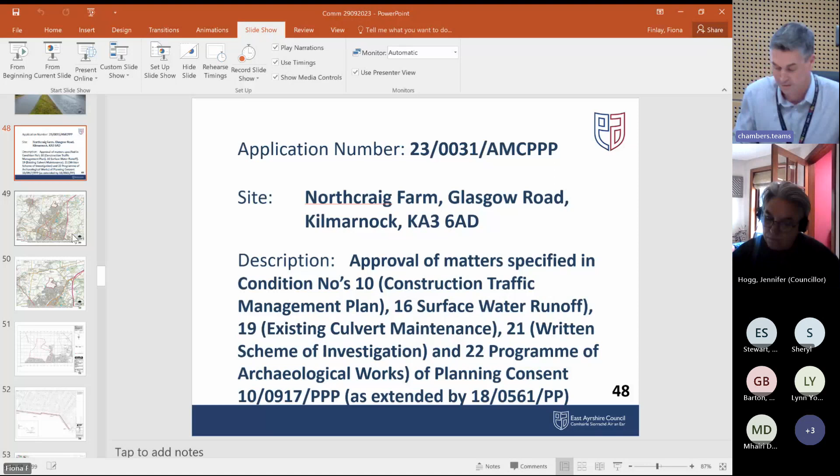This site is part of the overall Northcraig residential land release with the extant live planning permission for residential development at the very north of Kilmarnock. There's quite a significant planning history for this site, and members will recall that a layout was at Planning Committee earlier this year, and that starts at paragraph 7 of your papers.

We have before us an application for approval of matters specified in conditions of a planning permission in principle, to discharge the stated conditions. These relate back to the original planning permission in principle for the site, detailed at paragraph 15 on page 153. Members can only consider the details within these 5 conditions as part of the decision-making process today. For clarity: condition 10 for a construction traffic management plan, condition 16 for surface water runoff, condition 19 for existing culvert maintenance, condition 21 for written scheme of investigation for archaeological matters, and condition 22, the programme of archaeological works in relation to condition 21.

Consultees in turn have advised from ARA Traffic that the revised CTMP for condition 10 addresses the haulage road and lack of info on staff parking, site deliveries, wheel washing, and the extended route to the site, and these all address ARA's initial comments, following some discussion back and forth with the developer.

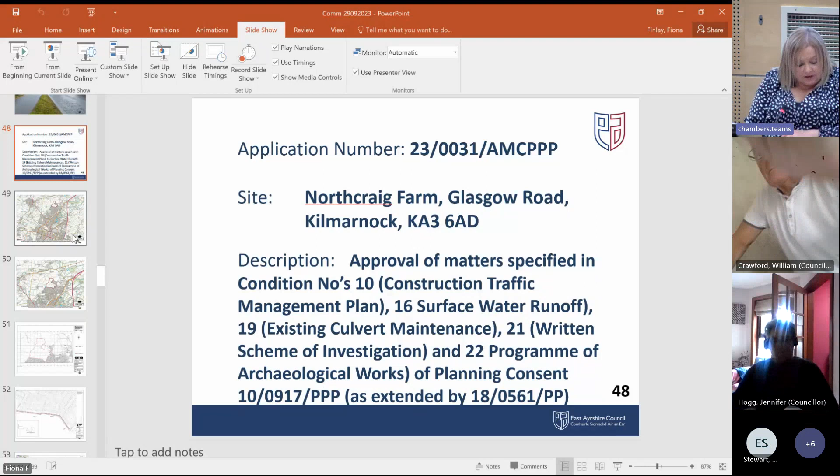ARA Flooding have no objections and advise conditions 16 and 19 can be discharged following confirmation being provided by the applicant to address ARA flooding issues. SEPA has no objections, and WoSAS has no objections in terms of conditions 21 and 22.

I have a couple of plans for you, members. There's not a great amount on this one, it's just more to remind you where the site is, because it's really just conditions that we're discharging.

This shows you in Kilmarnock - you can see we're very north of Kilmarnock, this is the Meiklewood interchange. You can see South Craigs here, and we have the Northcraig residential development about here, so very top of Kilmarnock. For context, this is the roundabout where Western Road and Glasgow Road meet, with the neighbourhood shopping centre just there, so we're in between that and the M77.

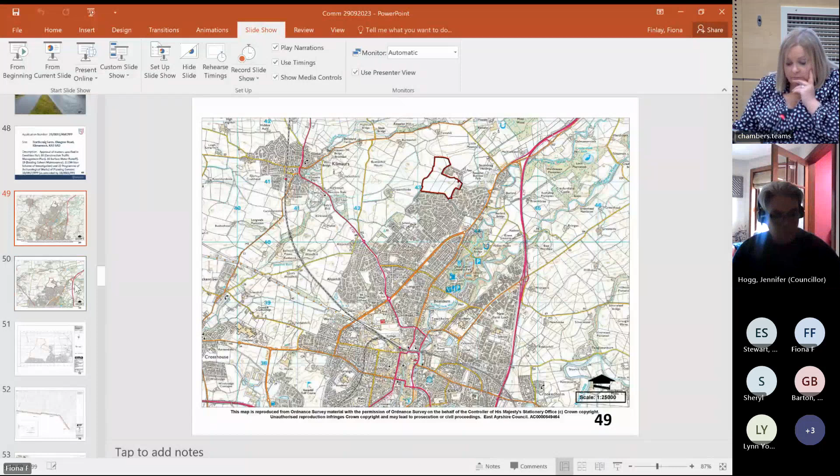A bit more detail there, members - you can see the neighbourhood shopping centre, Southcraig Holdings, the industrial estate, and the motorway interchange up there.

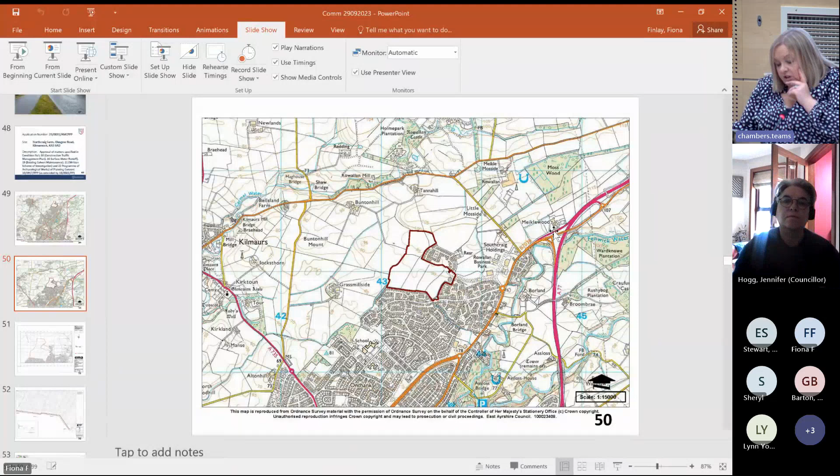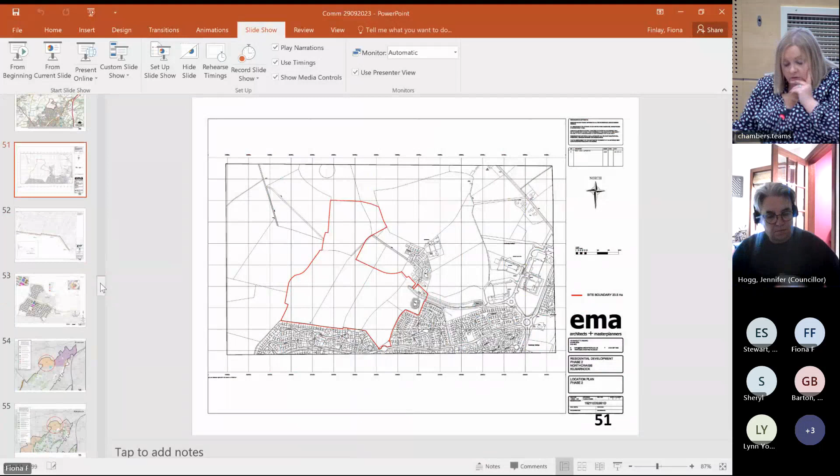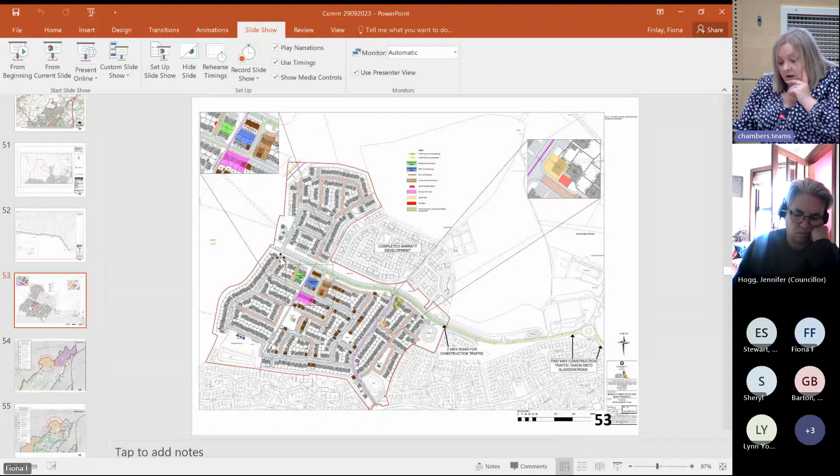And just the site from there, members, to show you the application site itself. This shows the details of the CTMP, about construction traffic being taken in off the main road and limiting to that, and the general layout there.

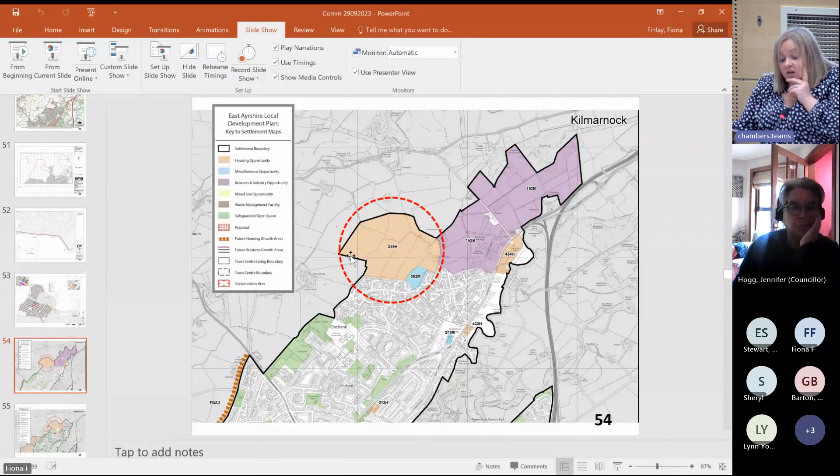I'll just show you the site layout in terms of the allocation under the development plan. It's residential in nature, and that supports the planning permission in principle. There's probably not an awful lot else to show you, members, but I'm happy to work back and forth.

We do have 2 letters of representation objecting to the application. These are detailed in your report, but in summary, one of the objectors has asked if drainage is put in, will Wood Hill Burn be left as it is? If so, there are concerns that it would become stagnant and foul.

In response, we've advised that condition 16 relates specifically to mitigation work to prevent surface water runoff from the development entering existing residential properties, and in general terms the proposed application layout proposes 3 SUDS areas to manage and control surface water flow. As per the report, the aim of SUDS is to slow the flow of surface water, encouraging natural infiltration, water storage and controlled water dispersal.

Maintenance will be by the factor for the estate, responsible for ensuring the SUDS basin is maintained and mown, inspecting grass swales for debris clearance. Significant sediment accumulation will be noted, initiating measures to clear these and prevent sediment entering the grass channel, and reseeding failed areas. Maintenance of a hawthorn hedge has been queried, and existing hedging on site is to be maintained by the landscape factor.

Issues with nettles spreading into neighbours' gardens were raised. We can advise that a landscaping area is to be provided to benefit existing properties that adjoin the site and provide a natural buffer between existing and new development. The drainage ditch is there to further benefit existing properties, preventing surface water entering properties, and it is to be regularly subject to factor-controlled maintenance, including removal of nuisance plants.

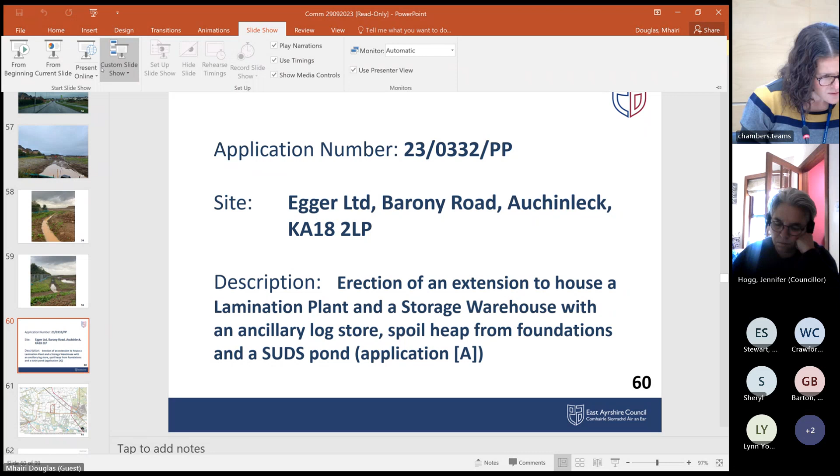So this report considers 3 separate applications for planning permission, which are all intrinsically linked to the same development. One of the applications is for a major development and required to be determined by the Planning Committee. However, due to the interlinked nature of the other 2 applications, which are local developments, it was considered expedient for the Planning Committee to determine all of those applications. I'll summarise each of the applications before going on to some site photographs and a summary of the main considerations and recommendations.

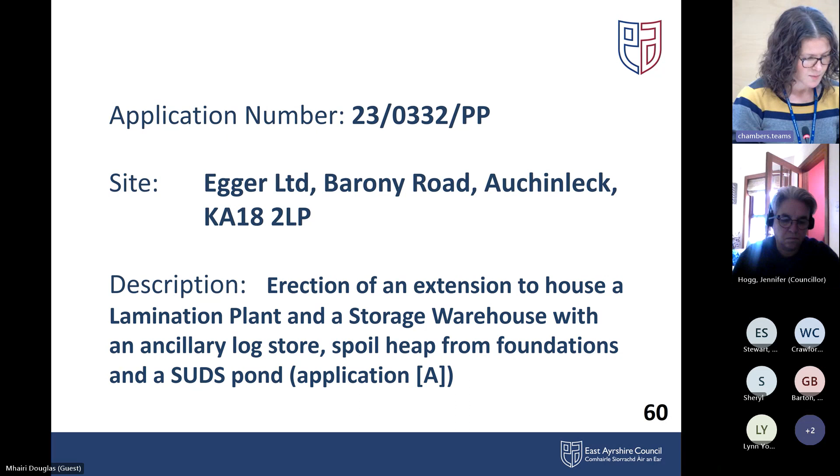So the site for development is located on the Barony Road, approximately 1.4 kilometres west of Auchinleck. The site was formerly used as a coal processing area associated with the Barony Colliery, which is on the south side of the road.

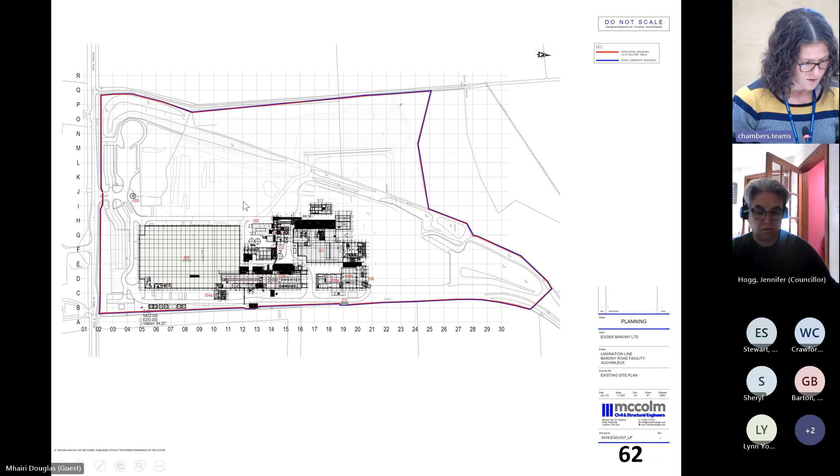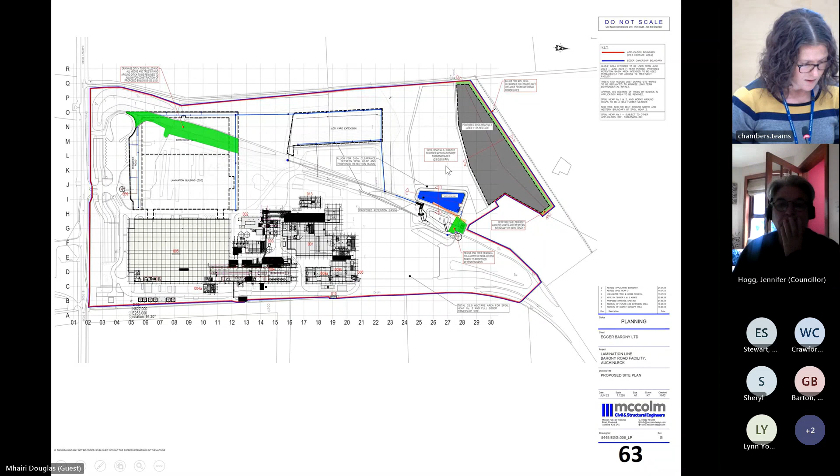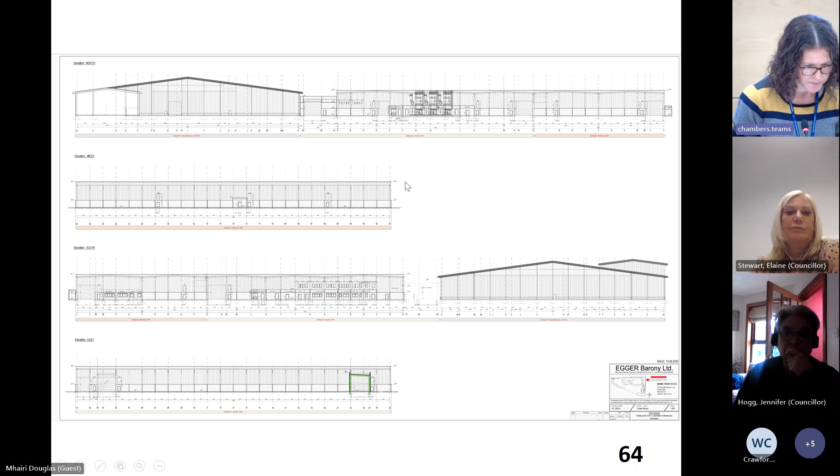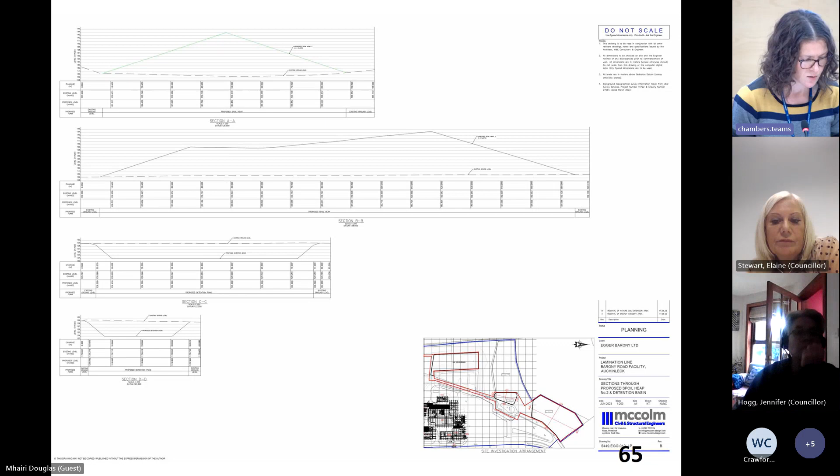As noted in the report, there is no clear justification for the storage of excavated materials from the site at this location. It would normally be necessary for such materials to be reused in some way within the site in line with the waste hierarchy. However, the disposal of such materials at this location without any particular need is considered contrary to the waste hierarchy and NPF4 Policy 12 and LDP Policy WM1 as detailed within the report.

This is the second application now. It falls within the local hierarchy and is referred to as Application B within the report. This is an application which is solely for the storage of excavated subsoil from the site for the extension.

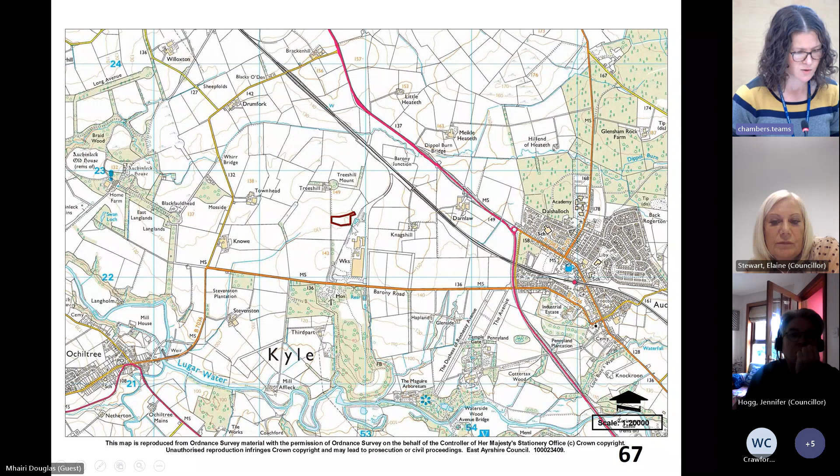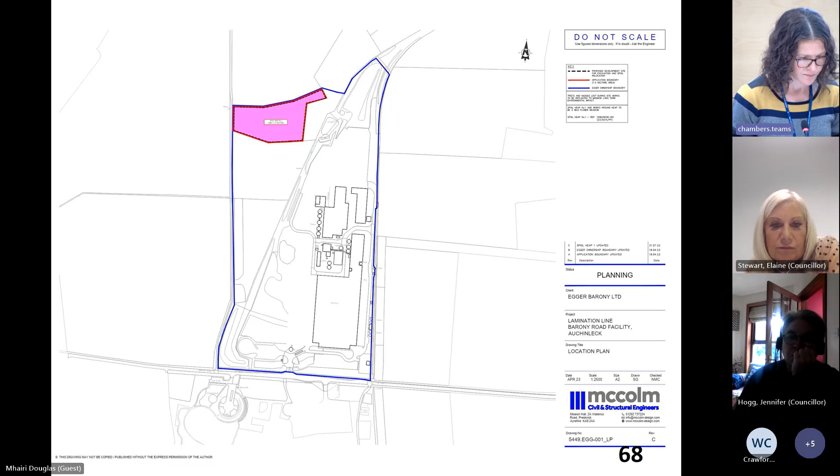This is the location outlined in red. You can see it's just to the north of the Barony complex and the other application site that we've just looked at. This is the existing site plan with the site shown in pink. The land is agricultural and out with the Egger complex in the former coal processing area. The site for the application is between the log store extension, which is here, and the spoil heap, which was proposed under application A, to the right-hand side of this one, the one in pink.

Both spoil heaps together comprise of around 11,000 cubic metres of materials that are excavated from the larger site.

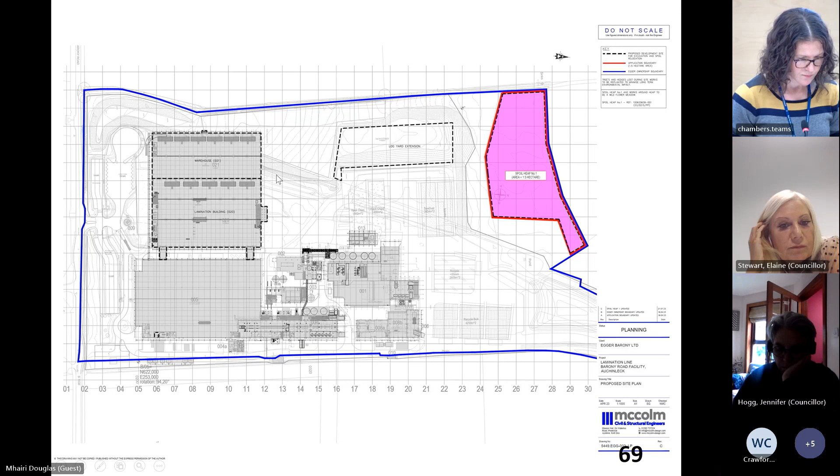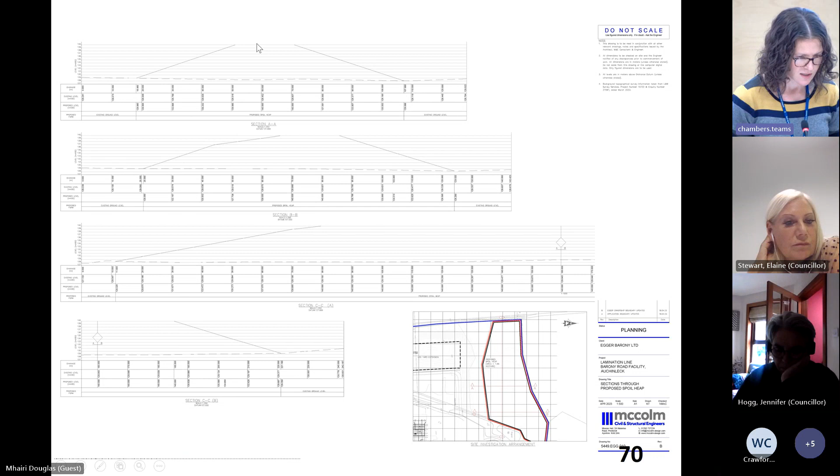Moving on, this shows sections through the spoil mound, although this is also slightly out of date since the area for the spoil heap was reduced in size. As with the first application, there is no clear justification for the storage of materials in this location. So you can see the sort of peaked formation of it, the sections that run through it.

The third and final application, referred to as Application C, is for a new temporary road for HGVs. This is proposed for a temporary period of 1 year to allow for the movement of HGVs within the site whilst construction is taking place.

The site here, which is a red line, is to the west of the Barony complex, and it's based on an existing farm track which leads to Treeshill Farm.

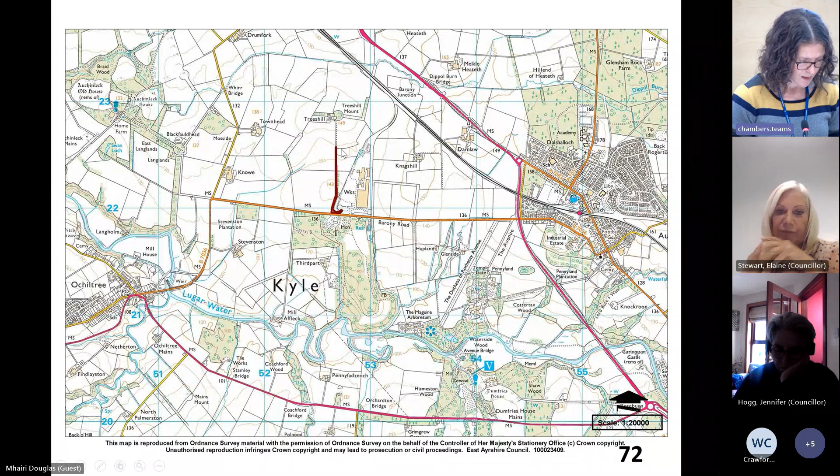This shows in a bit more detail the site. So the line along the left-hand side is the farm track, and the part which curves round to the bottom of the site is a new part of road which leads from an existing car park to the farm track. There wouldn't be any change to any access to the public road or any new access to the public road.

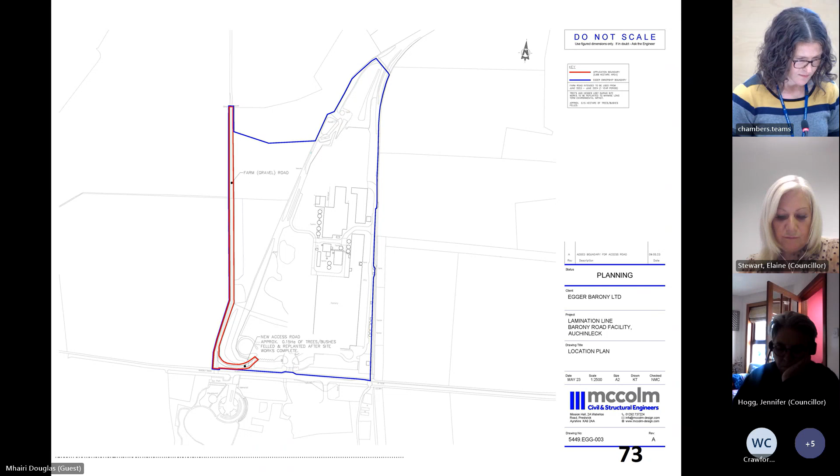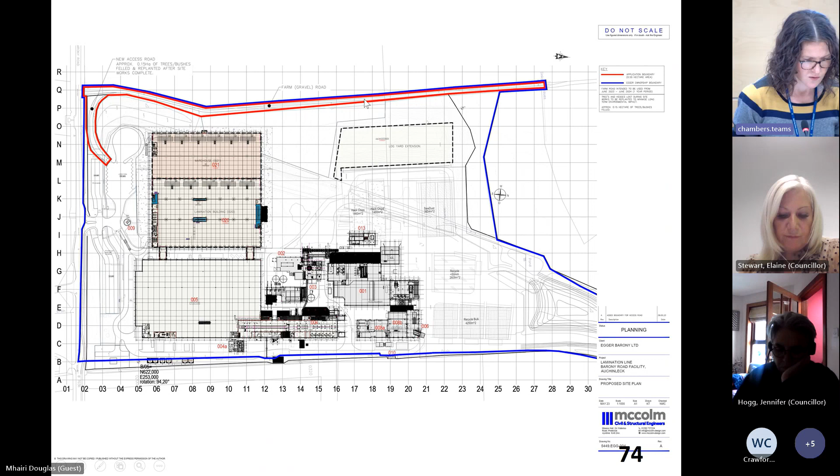So this is the proposed site plan. This just shows the line of the access track or road in relation to the rest of the site.

And this shows the proposed road in combination with the circulatory plan, which is proposed for the circulation of HGV vehicles within the site, shown in a kind of pink, the pink shaded roads. The existing road is intended for HGVs and is widened to a minimum of 3.5 metres with passing places. A circulatory route within the site is not part of the application site, however.

You'll see the area in green here. This is a new road which has been constructed, and you'll also note the contours here. So although it's not detailed in any of the plans, there has been a significant excavation along this area to form this road.

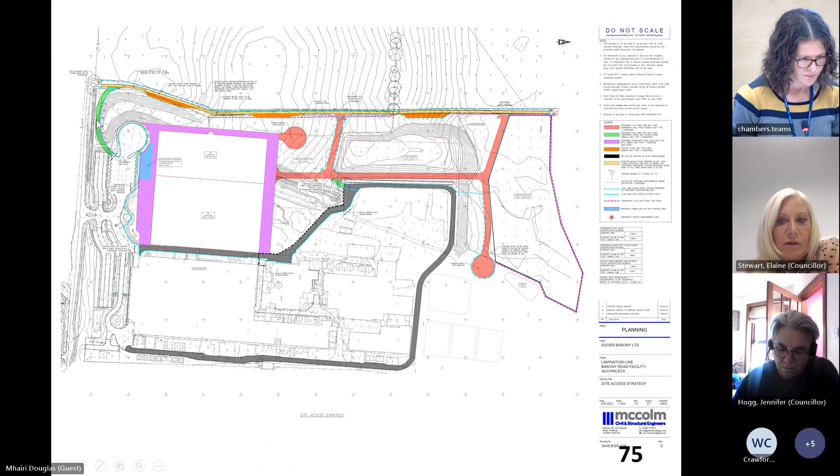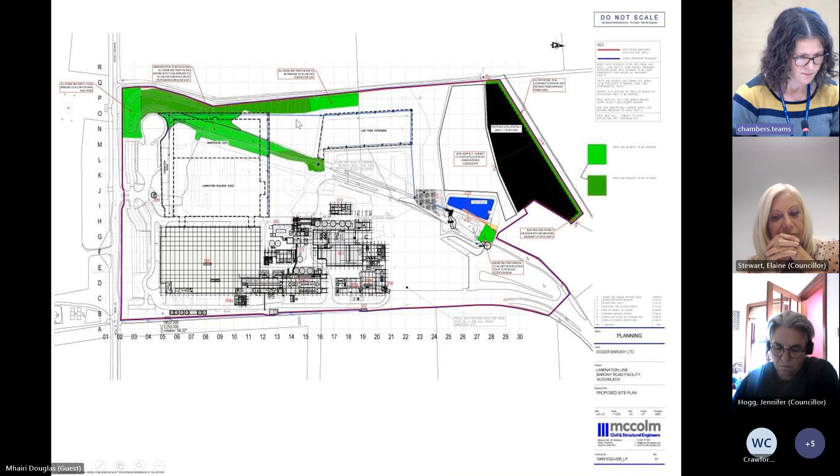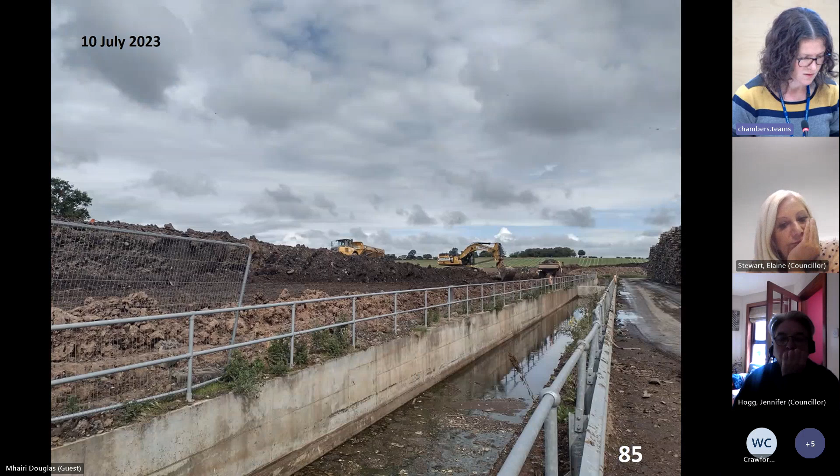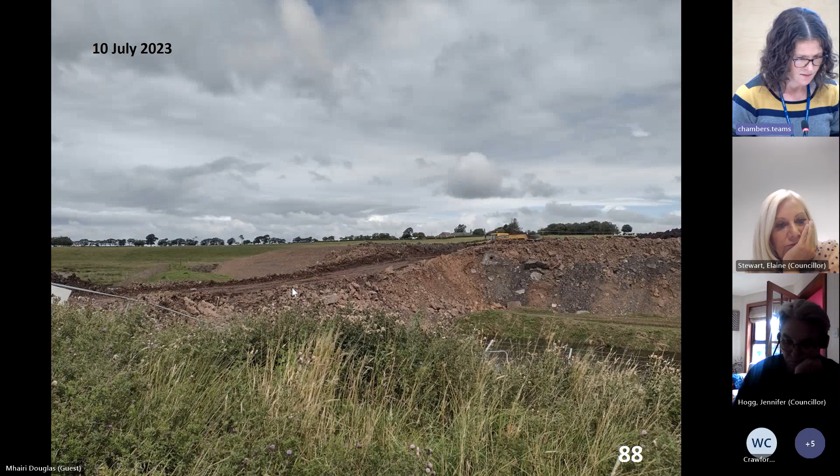And looking northwest to the area where excavated materials are being stored. This is the eastern part of the storage area. Panning to the left, or to the west of the site, you can see the vehicles that were shifting the muck to this area.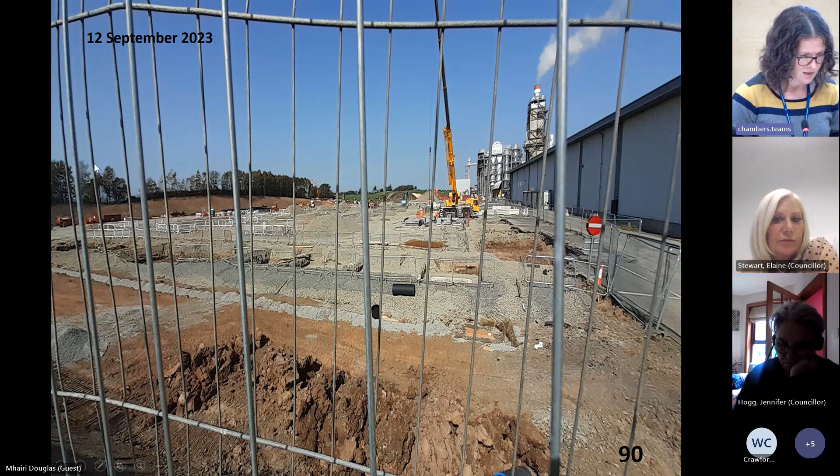These are slides now that were taken on the 12th of September, so quite recently. You can see what's moved on fairly significantly. This is looking north, from the car park area to the site, with the hardcore laid and foundations being piled, and you can see the excavations along the western boundary and the remaining trees.

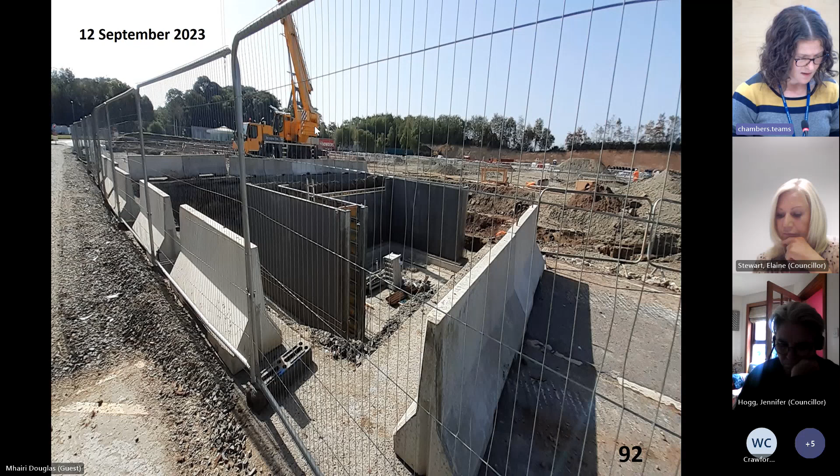This report considers all three applications together as they're effectively all part of the same development. Assessment against the development plan, which comprises NPF4 and the LDP, notes that the lamination plant proposal in particular is considered contrary to NPF4 Policy 3 on biodiversity. For major developments, there are strict requirements on the need to demonstrate that development will conserve, restore and enhance biodiversity. This has not been done fully, and nor will it be possible to fully provide this, as there have been no pre-construction surveys undertaken to understand the biodiversity or habitat characteristics of the site, and it's therefore not possible to form an assessment of the negative impacts of the development and thereon propose fully informed mitigation and enhancements.

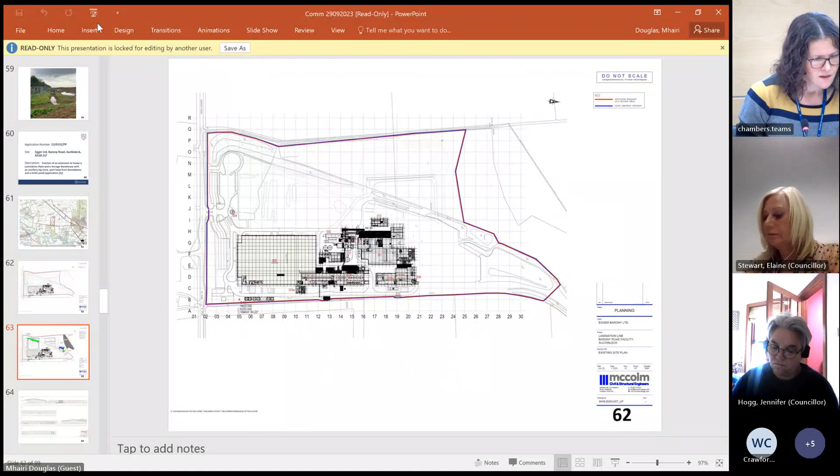I was just wondering, is it topography? Is that the right word? It's more than a mile from Auchinleck, so can this be seen from Auchinleck?

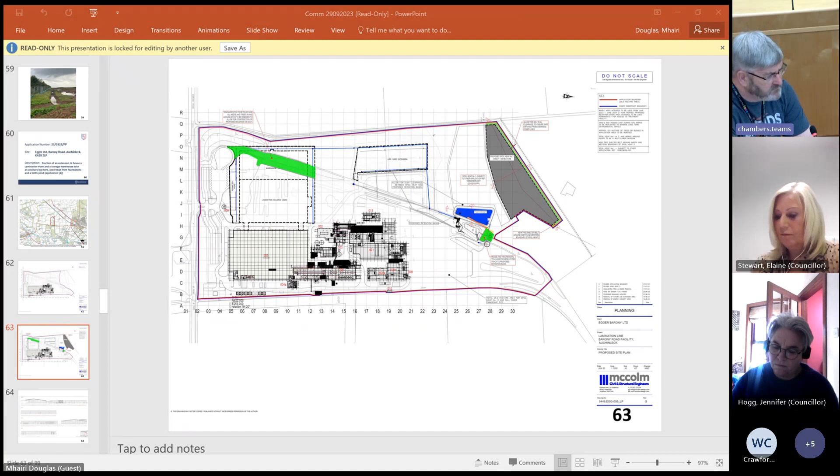No, it's behind the factory. So if you're going along Barony Road, you've got the factory to the front, and the extension to it is also to the front, on the left-hand side. Then you've got the yard behind, and the bund, the spoil heap, is to the rear of that. So it's unlikely to be viewed from anywhere, to be honest. Apart from a farm further to the north, owned by Egger, but I don't even think you'd see it from there. So it's not a huge site, no.

Through you, Chair, just to confirm, it shouldn't have any visual impact in itself because of its location at the rear of the site. As Barry said, you can't see it from the road, never mind Auchinleck, and the nearest farm you could view it from is Thornhill, referred to earlier for the access road, which Egger themselves own and control. So there shouldn't be any visual impact, and to be fair, I understand that was the model when the original factory was built - originally when soil was excavated to build the original factory, it was the same approach, and there was a previous bund there, part of which is getting moved now. So it's repeating the process that was put in place when the original factory was constructed. From their perspective, I'm neither buying nor selling.

Can I just ask a question, Barry? Condition 17, on biodiversity - I know you said we can't measure the loss of biodiversity due to the fact that work had already commenced. How much can we strengthen that as a planning committee to try and enforce a quite substantial biodiversity gain out of this?

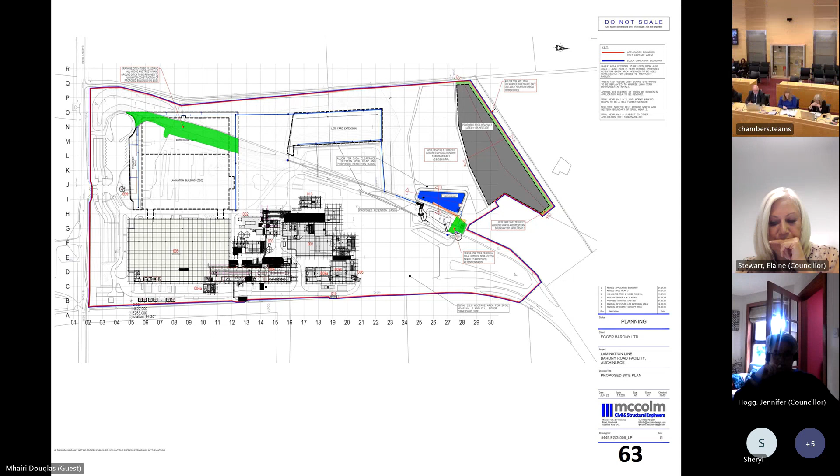Condition, what was it you said? It was 17?

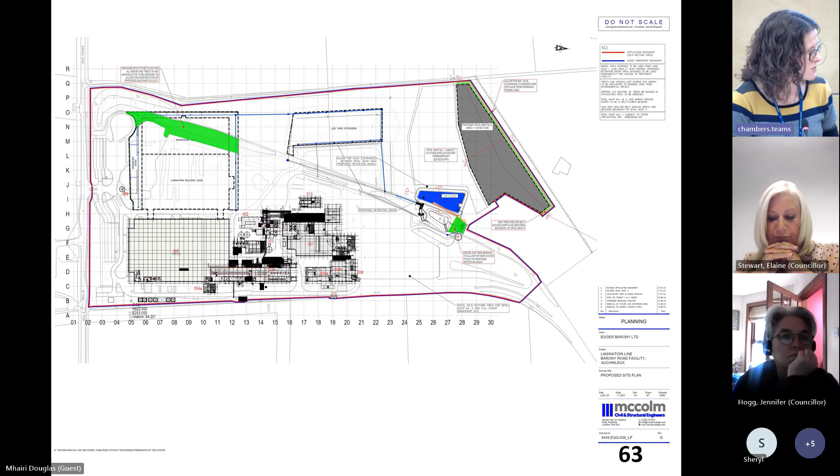Without knowing - I have an understanding of the site as it was - it's difficult to know, because that should form the basis for proposing mitigation. In the first instance, it should have been to try and avoid as much as possible and conserve what's there. So now we're looking at a site which has obviously been constructed, and we know there's been a loss of biodiversity. What we may be trying to seek from the applicant is more details on that and what has actually been lost, because at the moment we're still not completely clear.

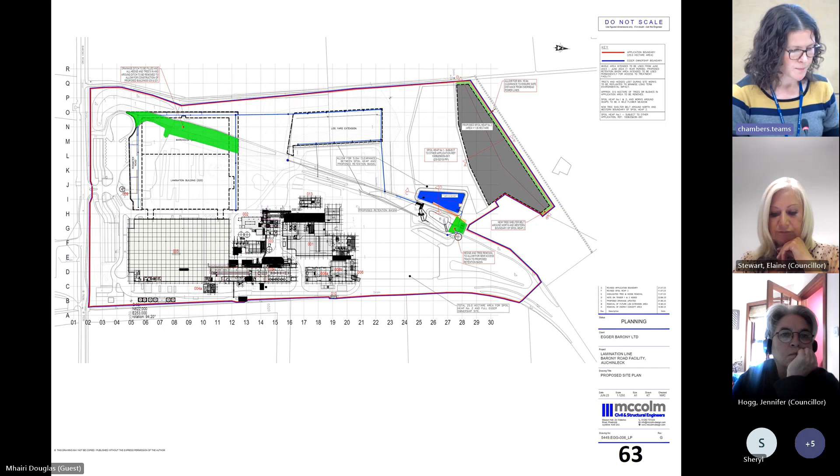They do have land available to them to provide biodiversity mitigation and enhancements, albeit it will be a bit of a guess, to be honest, because we don't know how much they need to mitigate by and how much they need to enhance by. But we do know there is land available to them, within the site and outwith it as well. But really, we would be looking for the applicant to provide a lot more than what they've already done within the application.

Through you, Chair, I'll just bring to members' attention there's a balance to be struck here, because what was on the site, it wasn't a greenfield site before the development commenced - it was the operating Egger factory, an industrial site. Therefore, while it's not helpful that the works have started, and it's not helpful that we don't have the ecological and biodiversity starting point, it's not unreasonable to assume that it wasn't exactly going to be a site hoaching with ecology and protected species, etc., because it was an operating factory already.

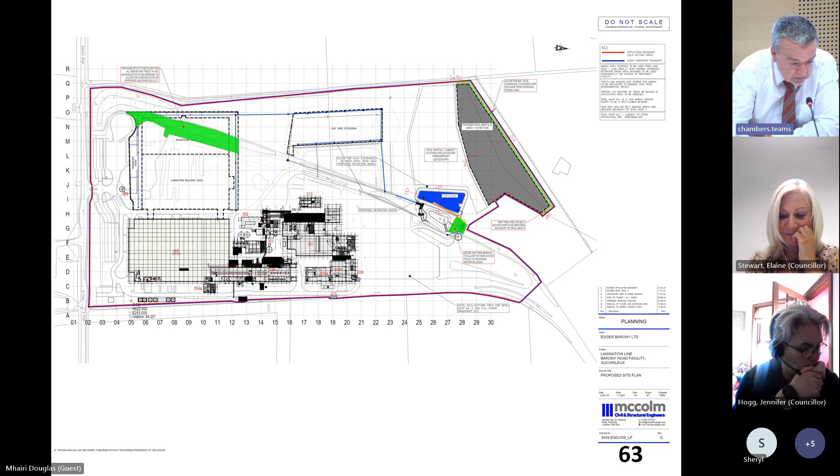However, it still remains that the impact of starting development earlier, before the relevant surveys could form the baseline, does create an issue, because NPF4 isn't about mitigation or like-for-like, it's about trying to get to betterment. So if you don't have the baseline, what does betterment look like? There'll need to be a bit of judgment in the round. The short answer is the application will come back, and if it doesn't go far enough, it'll be back at committee, where the committee can push for more in terms of enhancements and betterments. But that's going to be more about a quantitative argument, how many trees, how many mitigation measures, because there isn't anything to debate in terms of the baseline, because we don't have that.

But I do think the balancing factor is quite simply that it was still a factory before works commenced in June in the extension, so it's reasonable to assume it wasn't at a high level of biodiversity as a starting point. But that's the parameters within which we need to work, due to the way circumstances have played out.

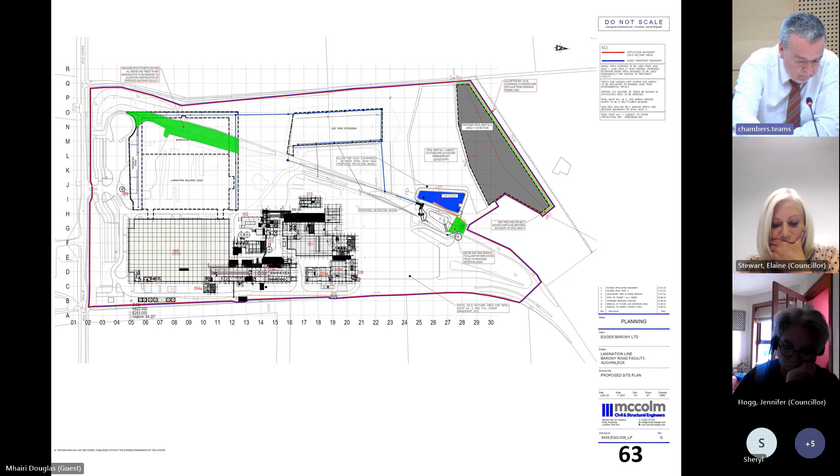Thanks, David. I'm going to bring in Councillor Watts first, then Councillor McGee.

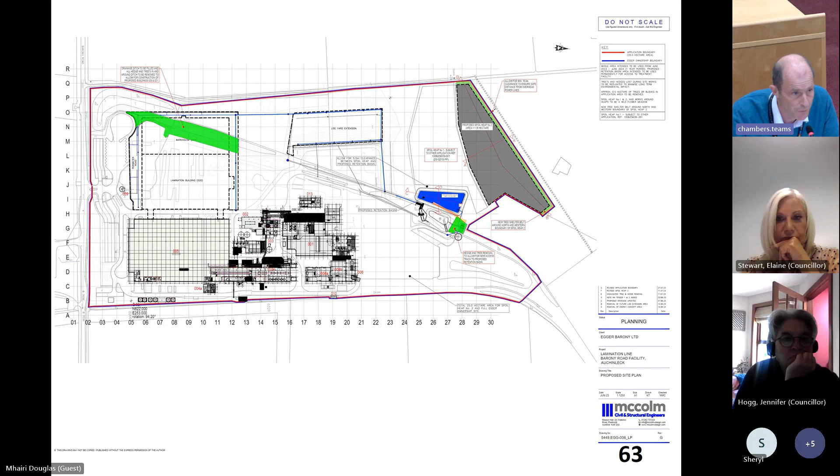Thank you, Chair. I just want to move approval in line with the report, and following the conditions laid down by officers.

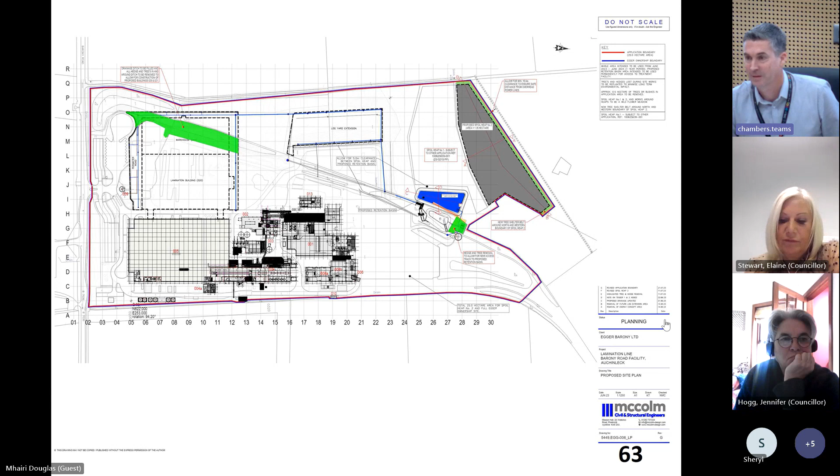Do you want to second that? Councillor Frail. Yeah. And Councillor McGee, do you want to come in?

Just before we determine things, on the biodiversity, again, looking at the photographs, it seems there were some trees that had been planted, but they look as if they were planted quite close together, fighting for light. So I was wondering if, looking for some betterment, we could ask for reasonable planting with proper species to enhance the area, given that we haven't got that baseline to start with, because they've torn everything down. So we don't know if there was a badger sett there, or bats or whatever. We can only go with the letter they've written in, which wasn't from an expert in their field. So I'm wondering if we could do something like that. Thank you.

Yeah, well, that's the thing, we don't really know. The biodiversity value could have been not very high. As has already been noted, the site is primarily brownfield, albeit there's a portion which is outwith the brownfield site, and it probably will have a biodiversity value of sorts.